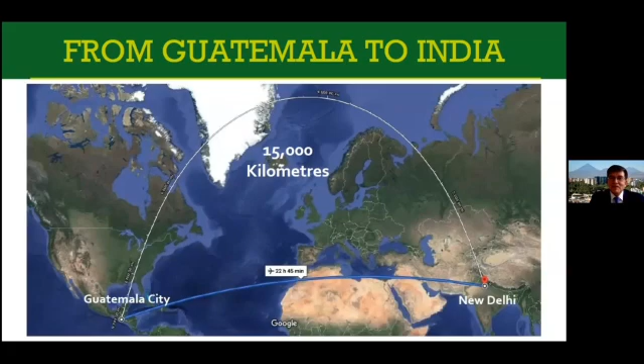And here's Guatemala, my country, so small compared to India - 17 million people and 108,000 square kilometers. That means we are 30 times smaller in size.

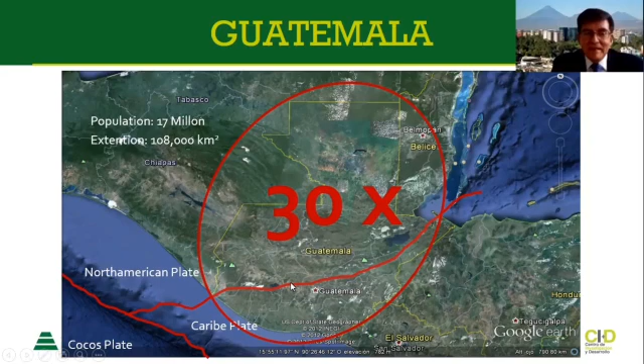But it's a very shaky place because we are among 3 geological plates - you could see here the North American plate, the Caribbean plate, the Cocos plate. That means lots of quakes and earthquakes, and lots of volcanoes - almost 40 volcanoes in that territory, at least 3 of them active.

So greetings to all from the beautiful Guatemala City, the capital of my country, Guatemala. Here we'll see a small introduction and background on the subject that we are talking about today.

In the year 2020, everything was okay, everything was going well. Everything in January, February of this year was good. But then, you know, disaster struck us everywhere.

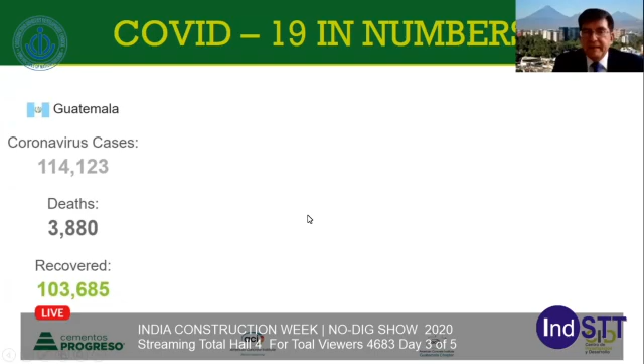And the ready-mix industry - what were the first reactions? It was a shock, what could we do? No more construction projects, everything stopped. What did we start to do as an industry? After the shock, we thought helping with cleaning the streets with lots of water and soap was the solution, and was a great idea maybe. We didn't know at the time if that could help with something. Maybe, I suppose, it was at least a psychological help, but unfortunately not more than that, and for sure nothing that would help our industry in the financial numbers. But at the time, we had the trucks, we had the people, so we tried to help.

From August up to date, everything seems rather normal, but the damage has been done already. We estimate we'll close around 85% of the original budget. Maybe not as bad as we estimated in April, when we thought getting to 50% was a good number, but we are getting around 85%, not as bad.

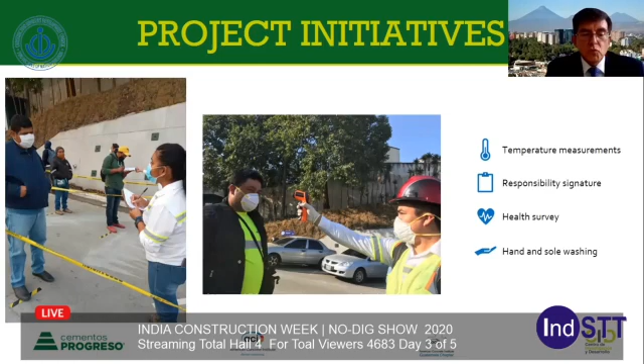But we have to take action. The projects opened again as early as May 2020, taking proper precautions: temperature measurements 3 or 4 times a day, a responsibility signature from every worker, daily health surveys, hand and shoe soles washing every hour or so. Even on the helmets you could find valuable information, using different colors, ID codes, week number, working area, working sub-area, type of activity, that kind of thing.

Our construction industry in Guatemala, including the ready-mix industry, is very conservative and rather slow, so to speak, where decisions on new methods and initiatives could take months, maybe years. So we had to find new ways to work, because we were trying to rescue the year 2020. And we did it, starting with the easy things to do: the cost reductions. We'll see some examples here.

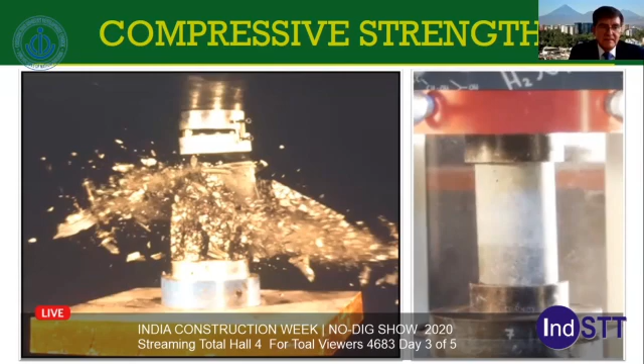But the problem is that we give in the range of what I call the gift zone. That's magnificent for the client, of course, but not much for us, unless in the present circumstances. So we review those gift zones for the different types of concretes and try to reduce them to where they should be, covering the required strengths, yes, but not much more.

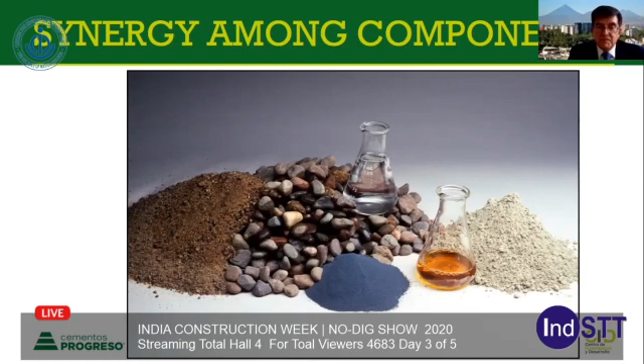And we save tons of cement, and tons of cement are tons of money. So the other important source of cost reduction focuses on achieving synergies between components of the mixes, for example the proper combination of different types of cement. We have several types of cement with different percentages of supplementary cementitious materials - in our case, natural pozzolan. Since we have lots of volcanic ash, that makes sense.

Usually the more SCMs the cement has, the cheaper it is. Interestingly, we found we can achieve significant cost savings when we use a combination of more than one type of cement in our mixes, combining performance with price. We have to make trials on this, but it pays off, as well as with other components such as the type of admixtures. The perfect combination could get you huge savings. At the end, these initiatives - monitoring required strengths, synergy between components like combining different types of cement or admixtures - could help you reduce costs. You have to invest in several trials, but they pay off, believe me.

Until now, we have not spoken of any technological advance or technical acceleration. But as I said before, our ready-mix industry in Guatemala is very conservative. We usually are not eager to try something new - and by new, I mean new in our market, because probably it's something old or state of the practice in other places, but not with us. They are not new for us.

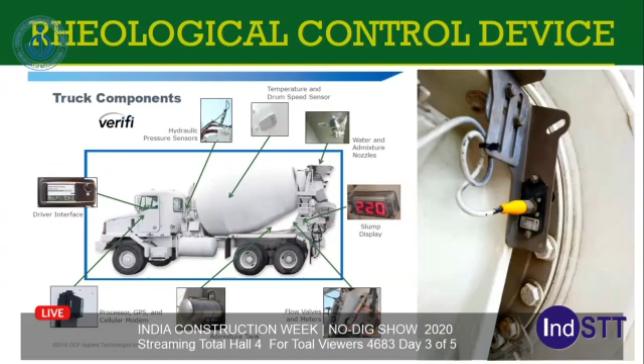For us, that was new. We knew about it, but we didn't care to implement it until now. All of these features have direct influence on acceptance requirements on the project, proper workability, maintaining water-cement ratio and strength, reducing the coefficient of variation. That was very important, because that permits reducing the amount of cement in the mix and making it more economical.

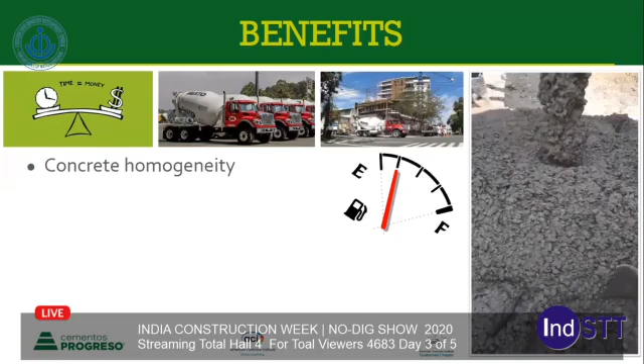And optimizing mix design. The direct benefits are that you have more homogeneous concrete with no rejections, which means zero disputes with clients on site, a task that consumes so much time and money. Also concrete stability and slump control. The mixing time is optimized also. The plant and in-project dead time per truck is greatly reduced, so you don't have the trucks waiting too much time or losing money.

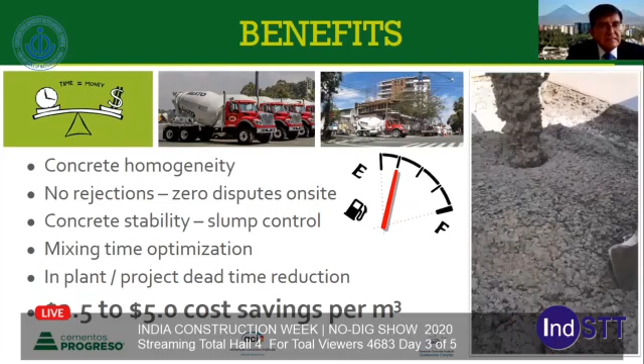All this means money, $2.5 to $5 per cubic meter in savings. That's what these devices could save for you. And that's a lot of money.

The other initiative is an example of what we are doing: estimating the strength of concrete by its maturity. In Guatemala, we measure strength by making specimens on site and then testing them in the lab. But as you see, making and handling specimens on site can influence directly poor strength results that are not in accordance with the placed concrete. By establishing a correlation between strength and temperature of the concrete, you can finally estimate, in real time, the strength of concrete in the element or structure.

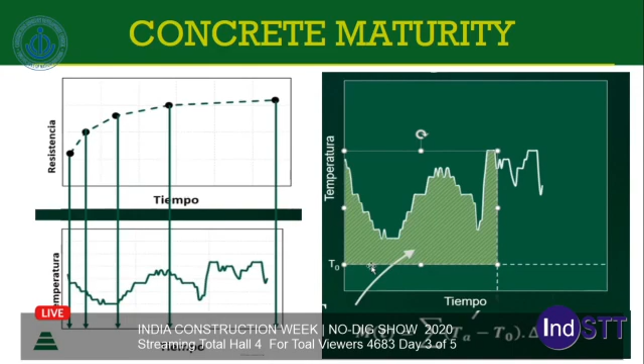Among the benefits we have: prediction of the actual in-place strength of concrete is important, and the phrase in-place is very important because you don't have that with specimens. Consistency on results. The results are collected in real time, another important phrase with this technology.

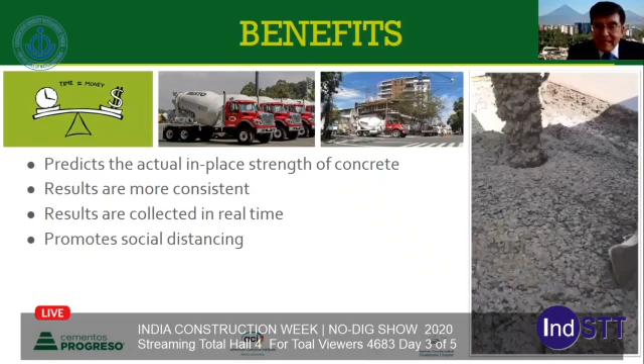And the promotion of social distancing - that is a direct consequence of the pandemic, because really, we didn't care about that before. Are you kidding? We love social gatherings. We love social events. We are Latin Americans. We love that, we love to be close to each other. But we understand now we have to take care of this.

And this methodology will help us maintain our distances. Also, we have direct cost savings compared with on-site quality and lab teams, instead of having people on the job site. Accurate job site planning, so knowing when to remove forms, for example, and financial savings as a whole for early completion of projects. So that means also a lot of money.

We are still determining the amount of savings we'll have with this initiative. We are working on it.

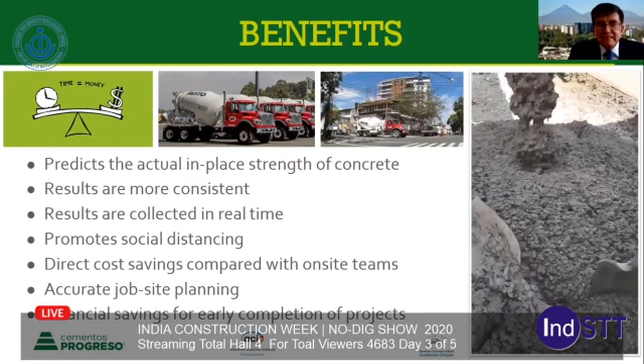And finally, as conclusions of this presentation, we know COVID-19 caused very negative impacts on the construction industry and the ready-mix industry, that's for sure. But with proper actions, we were able to come back. Probably not to 100%, but we are doing better than we expected in April of this year. And also, COVID-19 was an accelerator. It seems contradictory, but something bad accelerated our adoption of new ways of doing things that maybe before we were afraid to use, but now we use thanks to COVID-19.

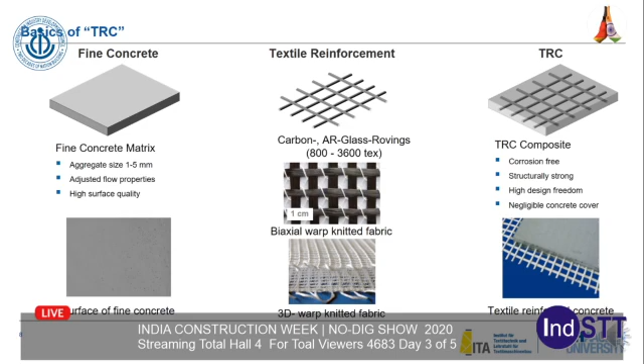TRC composites are corrosion free since the reinforcement does not corrode, dissimilar to traditional steel reinforcement. In addition, TRC composites are structurally strong because especially carbon fibers offer very high strength. They offer a high design freedom and a negligible concrete cover. So textile reinforced concrete offers many advantages over traditional steel reinforced concrete.

The reinforcing materials are usually carbon and alkali-resistant glass, but in addition basalt fibers and polymer fibers, for example aramid, PVA or PP fibers, can be used. Here, the reinforcing materials can be tailored to each application. For example, if very high strength is needed, carbon is the material of choice, but carbon fibers are quite expensive, so if less strength is suitable, it's better to use alkali-resistant glass or basalt fibers.

Why should you use textile reinforced concrete? In steel reinforced concrete, the concrete bears compressive forces and the steel bears tensile forces. This combination of material properties has led to the high success of steel reinforced concrete, making it the most important building material globally. However, the reinforcement is corrosion prone and requires a thick concrete cover, leading to high weight of the materials.

Steel reinforced concrete also offers a wealth of experience with more than 100 years of the material being in use and many general building approvals being available. However, the transition to textile reinforced concretes offers resource savings of up to 80%, leading to reduced CO2 emissions of up to 80%. Thicknesses can be reduced, depending on loads, by up to 70%, and the weight of building materials or precast elements can be reduced by up to 50%.

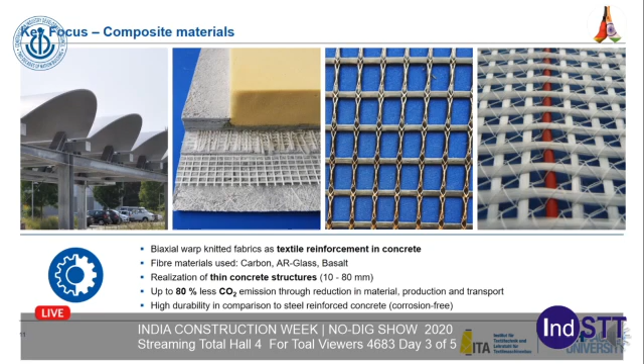In addition, we focus on intelligent textiles and product by functional integration, by means of using technical textiles. These technical textiles can offer a wealth of additional functions, for example surface heating, sun protection, heat protection, etc. We also study 4D textiles, which are facade textiles that can adapt to environmental influences over time by textile integrated mechanisms, for example closing a sunshade if the sun is high in the sky. In addition, we've researched shaped fibers for acoustic insulation, for example used in office spaces or in event locations.

Another focus of our institute is sustainability. Here we develop new sustainable resource-efficient materials, such as TRC. One very important topic for TRC is the design for recycling of textile reinforced concrete, where we already plan now for reuse of buildings built with TRC after their lifespan of up to 80 years is exceeded.

In addition, we research the application of recycled short carbon fibers in concrete and mortars, and we do efficiency analysis of composite production processes to decrease material and cut-off waste.

Another area of research is in geotextiles, where we do machinery development for production of leno-woven fabrics with high grid sizes as suited for geotextile applications, and we work on integration of warning systems in buildings and dikes to prevent natural disasters by using smart textiles and integration of sensors.

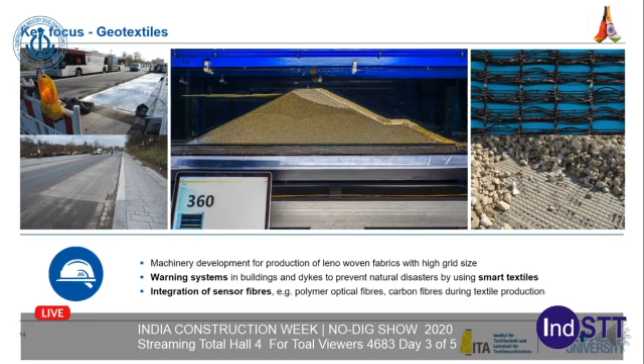All these developments we do at our institutes are not only theoretical in nature, but we have also produced a lot of demonstrators over the years.

For example, in 2009, while just building our new machinery hall, we built walls with the first TRC sandwich facade worldwide, and the facade still looks as good today as it looked the day it was built.

In addition, we developed light-transmitting concrete facades in cooperation with industry, functionally integrated TRC roofs which integrate either photovoltaics or thermics into the roof elements, and we developed curved concrete elements, as showcased in the pictures, which show that textile reinforced concrete offers highly adaptable thin structures with thin-walled elements for architectural purposes and to reduce weight and improve resource efficiency.

We offer here at ITA a cooperation along the entire value chain, starting with textile development and with 2D and 3D warp knitted reinforcement textiles, as well as leno-weaved textiles.

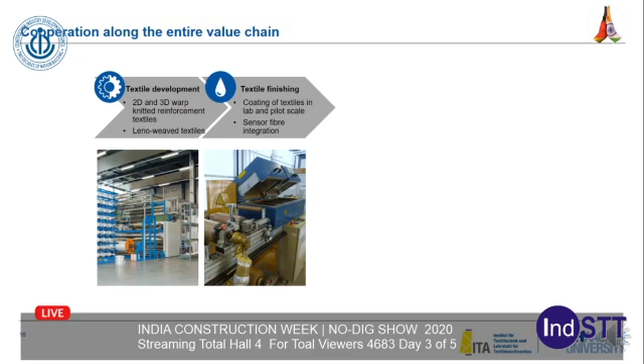Continuing with textile finishing, where we do coating of textiles on lab and pilot scale, and sensor fiber integration if necessary. We also allow for prototyping in our concrete lab, where we manufacture prototypes as well as standard testing specimens, and we also have polymer infusion labs analyzing polymer coating materials.

And we have acclimatized testing facilities where we can do fiber, textile, and composite testing, as well as optical and electron microscope tests, as well as an X-ray CT.

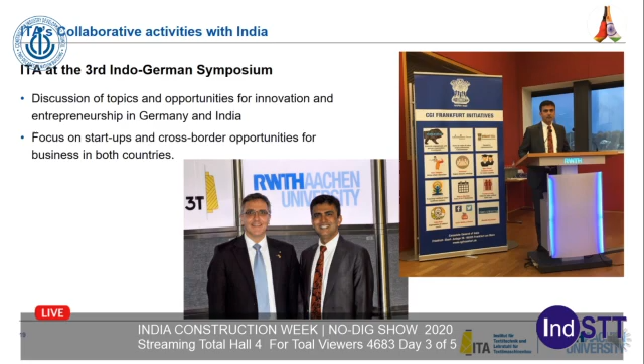Moving ahead, at the 3rd Indo-German Symposium, topics and opportunities for innovation and entrepreneurship in Germany and India were discussed. The focus was on startups and cross-border opportunities to channelize the developments made in the textile field at ITA into the Indian market through campaigns like Make in India and other government initiatives.

Now I would like to throw some light on one of the 2 projects which were initiated at the IGSTC board meeting, which I have mentioned before. The project name is Clean Water, and the goal is development of modular lightweight wastewater treatment units made with TRC for rural and peri-urban dwellings.

The project was initiated to tackle problems of untreated wastewater which is being discharged into the environment. Many regions have no access to wastewater treatment plants, and also face the high energy and space requirements which the current systems need.

Hence, the aim was to develop, manufacture, and implement a modular, low maintenance, energy saving, textile reinforced concrete wastewater treatment plant. Using textile reinforced concrete, the sewage plants can be made modular and of low maintenance.

The approach adopted for this project was first of all to develop a design for a TRC wastewater treatment plant. Secondly, to verify the load bearing capacity and suitability for use of the sewage plant at the respective site. And at last, to develop a transport system so that this wastewater treatment plant could be set up even in the most secluded villages in India.

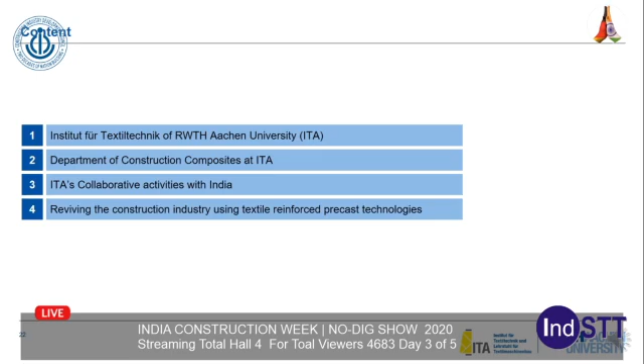Now I would like to put forward two research topics which we think will be beneficial for the revival of the construction industry. Firstly, textile reinforced 3D concrete printing. 3D printing has already found its way into the construction industry. There are already houses being 3D printed, but the deficit at the moment is that the 3D printed concrete doesn't have any reinforcement, and hence the absorption of the tensile forces is only possible via the matrix, which in most cases is not strong enough to sustain the forces which act upon the building.

And thus, the aim is the realization of an endless fiber reinforced 3D concrete printing process. The approach which can be adapted for 3D printing of endless fiber concrete is with the help of robots and textiles, and hence we aim at development of a process for the production of 3D textile reinforced structures.

Another way in which we can revive the construction industry is by using adaptive molding technology for the manufacturing of doubly curved textile reinforced facade elements.

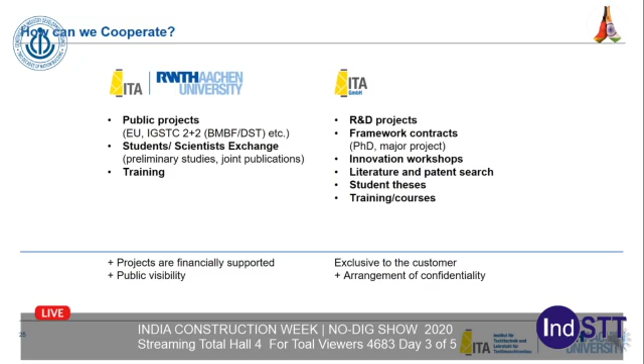Now I would like to summarize today's presentation in a nutshell. ITA is a leading textile research institute in Europe with more than 20 years of experience in textile reinforced concrete. The first tests on textile reinforced concrete were done at our institute back in 1998.

TRC offers multiple advantages over steel reinforced concrete, like higher strength, less weight, eco-friendliness, and resource efficiency, which makes TRC suitable for precast elements. And thus TRC enables a sustainable revitalization of the construction industry, as due to the lightweight, transport costs are being saved. Due to material efficiency, less cement is being used.

We are constantly looking for research partners with whom we can collaborate and further develop the textile reinforced concrete technology.

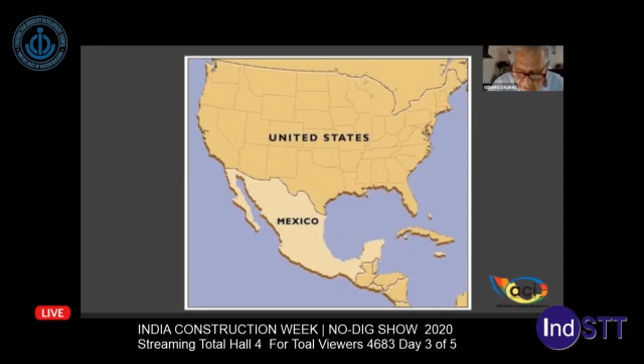Between these two countries, we have a border area that is growing because of the commercial treaties between them. You will find on this location cities that share friends, family, and partners.

Over the last 50 years, trade between these two countries has been increasing, and there is a lot of work on light industry. It started in Chihuahua State with the main city on the north, Ciudad Juarez, with about 1.25 million people, and some more important cities in Chihuahua State.

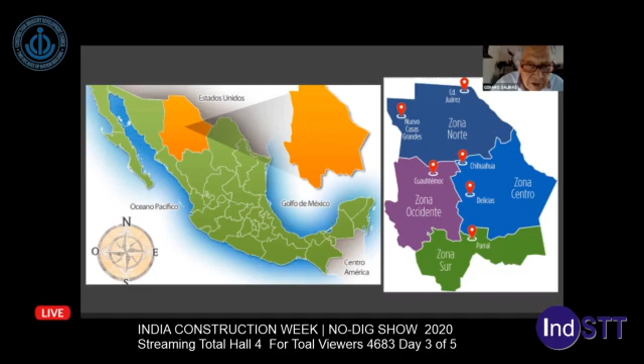And we have, over this period of time, changed some of the things in these buildings, like the roof, which moved from laminated asbestos to standing seam steel. The walls changed from masonry concrete units to tilt-up concrete panels.

The volume of these buildings increases, with the distance between floor and ceiling growing from 6 to 12 meters. And the industrial floor slabs, we have changed from a strength of 20 to 35 megapascals, and the distance in joints from 4 to 30 meters.

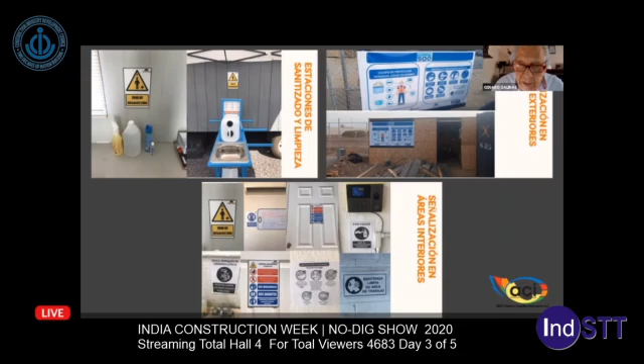At this time, because of the pandemic we are having right now, this is the way we are doing signage on the outside. Right here on the top right, all the signals that we have inside and outside of the building. On your upper left, you will find some sanitation areas where you can clean yourself and be protected. And inside, you have different types of signs talking about the equipment needed in different areas.

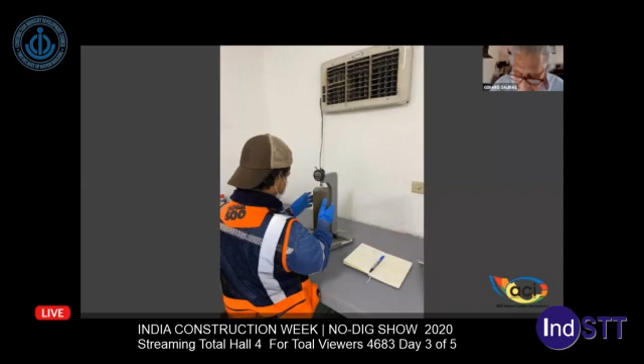Since the beginning of concrete production, everybody keeps a safe distance and wears all protective gear, even in the lab and on the construction site, like on these big floors that range from 1,000 to 2,000 square meters daily.

Even at different hours of the day, the inspection team always keeps their safety gear. And during all operations of construction, everybody has to wear the safe equipment to the end.

Because of this big boom in this industry, a lot of people came from other parts of the country, and we have an unemployment rate of zero. So we need to have housing for this population.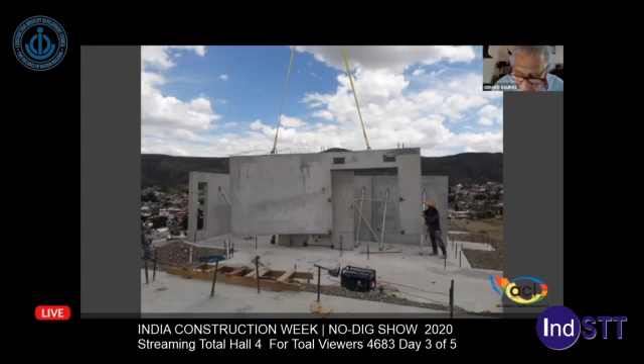And right now we're working on this housing in a precast mode, like right here. Before that, it used to be done this way, with handmade clay brick, post and beam construction.

This type of construction that we're using right now, precast, is what we use right here. This IMSS stands for the government department that deals with social security services and health services.

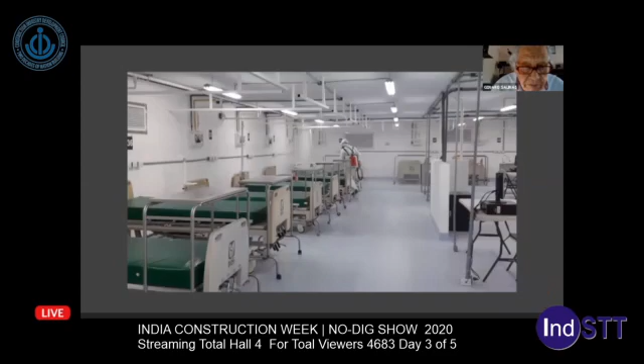And this is a hospital, a 60-bed hospital that we built in 15 days using the same precast mode, with all the equipment set and ready for any emergency during the pandemic.

This is the team that designed and inspected the construction of this hospital. And here are all the people that did the work in a safe mode, as I'm talking to you.

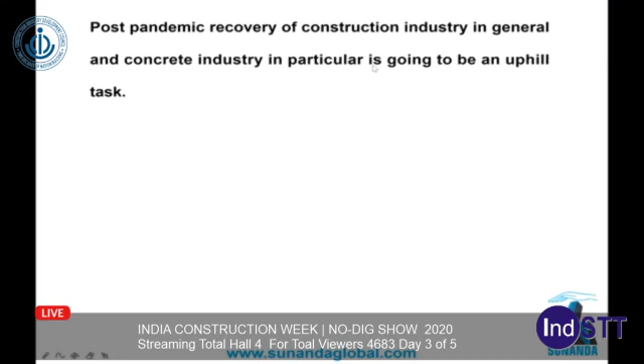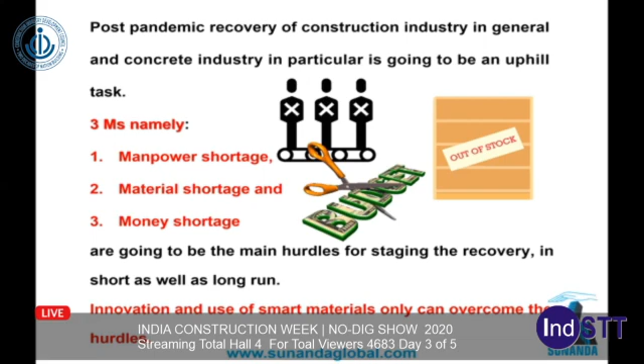As all of you know, post-pandemic recovery of the construction industry in general and concrete industry in particular is going to be an uphill task. We have been experiencing it for almost 10 months. Three Ms, I call them: manpower shortage, material shortage, and money shortage, are going to be the main hurdles in staging the recovery in the short run as well as long run. That's why innovation and incorporation of smart materials can overcome these hurdles. It can happen for greenfield projects as well as brownfield projects, because both require these 3 M's.

What do we have to look at? We have to look at reducing person-to-person interface in time to come - that is social distancing, respecting social distancing. This means despite low availability of manpower, we still have to enhance the output, the production. So this is about manpower and social distancing.

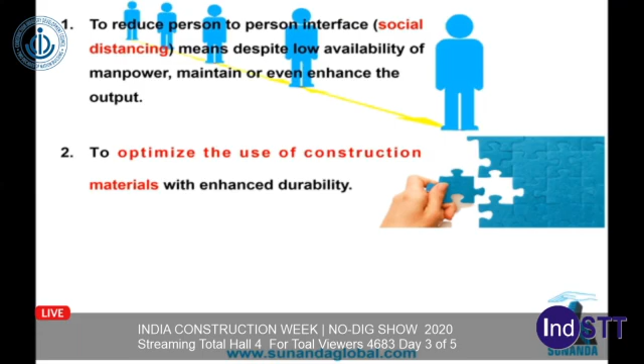Then we have to optimize the use of construction materials. We have shortage of materials, so we have to optimize that. At the same time, we have to make sure that the durability of the structure is also enhanced. And this together will in turn give rise to lower carbon footprint and reduced expenditure, at the same time leading to sustainability.

This smart concrete concept has been there for the last few decades, 2 decades, but it has not become popular yet. Why? Because probably the need was not felt, which is so much now today. So in smart concretes, self-cleansing, self-sensing, self-adjusting, and self-healing types are prominent, and they are useful in greenfield as well as brownfield constructions.

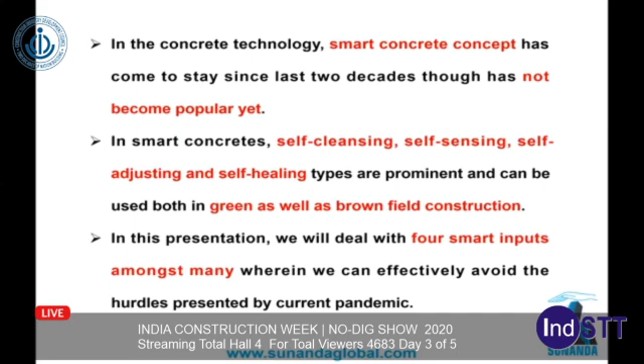Today's presentation, of all these smart inputs, we will deal with 4 smart items amongst many. First will be self-healing concrete, which will avoid cracks in concrete and enhance the structural stability and durability. Then we will talk about gaining the strength of concrete without external curing, which involves lots of manpower and possibilities of human error. Third point will be enhancement of service life.

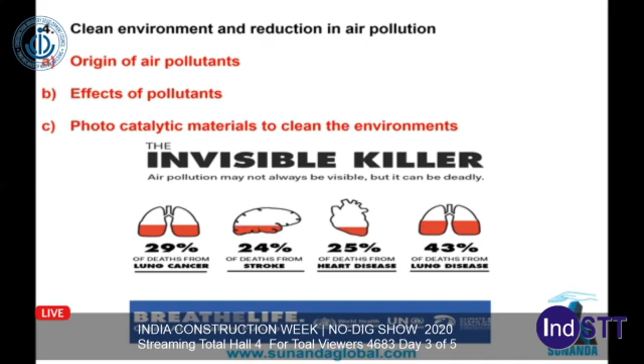Due to corrosion, lots of damages are happening, and we will try to mitigate this corrosion with smart materials and enhance the service life. The fourth point is very important in the post-pandemic era, that we have to maintain a clean environment. We have to reduce air pollution by reducing the pollution effects on structures. For that, we need to identify the origin of air pollutants, identify their effects, and then ultimately use photocatalytic materials to clean the environment and make it cleaner for us to inhale or exhale.

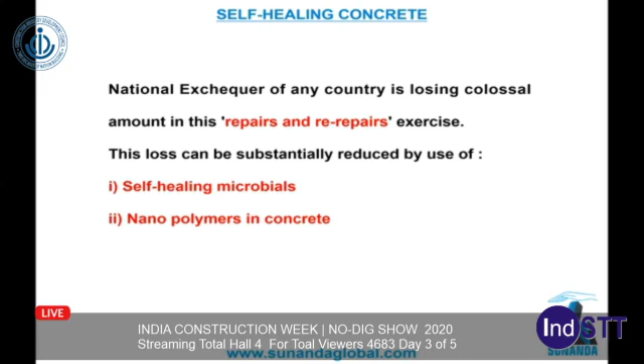We always see that most structures do not even give effective service for 25% of their service life, and that is mainly because of cracks. When cracks appear, corrosion takes place, and when corrosion takes place, repairs and re-repairs exercise begins. That is where we can use two smart technologies: one is self-healing microbials, and another is dispersion of nanopolymers in fresh concrete.

And this will not require any labor, this will not require new money, or any material, because all these three M's have been utilized right in the beginning of concreting.

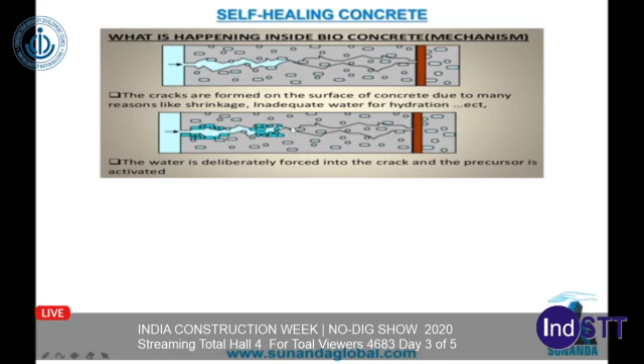This is the pathology of self-healing concrete cracks. In the first top diagram, you can see the crack developed. In the second diagram, you can see these microbials and calcium lactate coming in contact with each other to form calcium carbonate. This yellow material you see is calcium carbonate, formed in situ, and the crack has been filled, thus allaying the fear of danger or corrosion to the concrete structure.

I talked about the second option, nanopolymers. Nanopolymers are nanoparticles of liquid monomer, and that liquid monomer is easily dispersed throughout the concrete. Being nano in size, though used in very small quantities, it is present everywhere throughout the concrete.

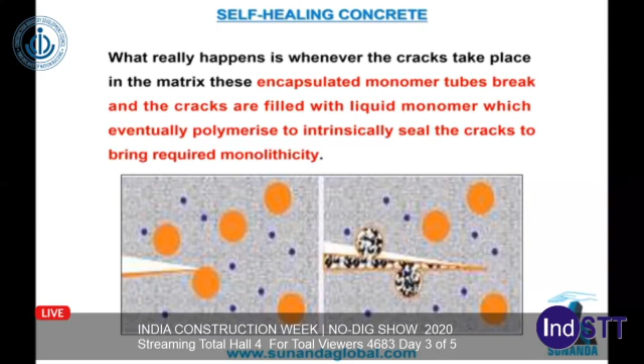Whenever a crack develops, like in the first picture the crack has started to develop, and in the second picture the crack has developed more, the nano tubes or nano-encapsulated monomer tubes will get accumulated in this crack. The encapsulation will break, and then that monomer will convert into polymer, filling the entire empty space, resulting in no loss of structural strength or concrete strength, and no ingress of moisture or chlorides from outside.

The second point we want to talk about is curing. Curing is an unavoidable operation. Unless curing is done very diligently and for a given number of days, the concrete structure suffers in its service life, suffers in its strength, suffers in the cracking pattern.

So gaining the strength without involvement of a human being, without involving any external operations, would be a smart thing, and we are going to talk about the same.

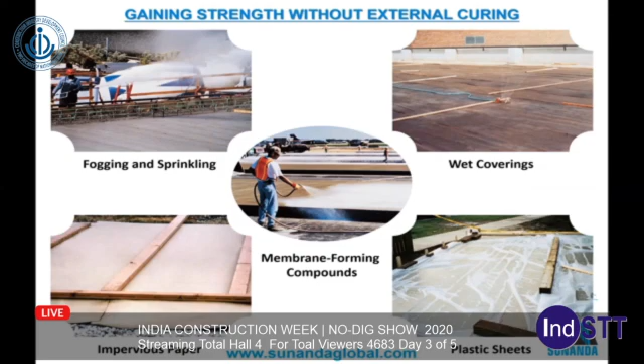These are the classical methods, good methods, classical methods of curing. There is fogging, wet covering, membrane forming compounds, then impervious paper and plastic sheet. All these are good, but they are man dependent, human error dependent, and time dependent. If there is any mistake in any of these, then the curing suffers, and in turn the structure suffers.

Now in post-pandemic times, all these mistakes are unaffordable because we have shortage of manpower while doing the structure itself, shortage of funding, shortage of resources, and shortage of materials. So for large structures or small structures, curing has to take place continuously, and that can happen only in a smart way.

What you see in the first two slides is concrete external curing. What happens is water penetrates inside and keeps the hydrated concrete in the hydrated form, reducing the escape of hydration water from the concrete to outside. But again, it is subject to the errors that I mentioned earlier.

Then we can see that whenever we are using an internal concrete admixture, underneath this classical curing, what will happen in post-pandemic conditions? If you try to do classical curing like water curing, then because of shortage of manpower and other things, the curing will not happen properly, and the depth of concrete curing will be much less, as you can see here.

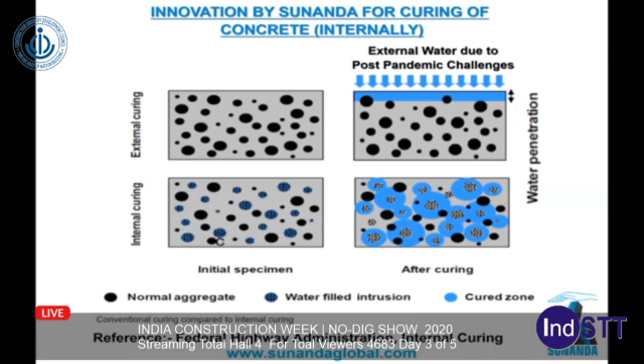However, post-pandemic, this should become a habit of the construction industry.

We are going to talk now about corrosion mitigation. Corrosion mitigation can be done by giving coatings to the steel or to the concrete, but there are always chances of errors, and because of that, the performance of corrosion prevention suffers. Corrosion, as you know, is a continuous process; it never sleeps.

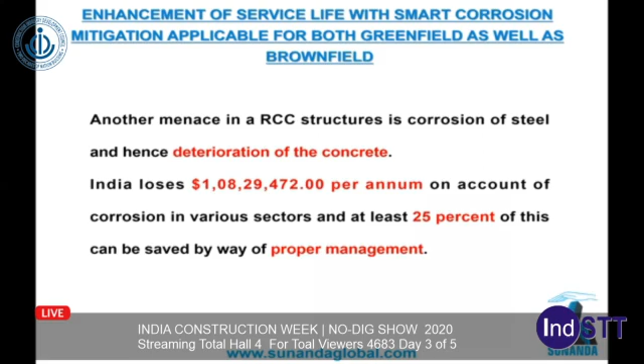There is a small entry point for these enemies of steel, that is moisture, chloride, or SOx and NOx, and in that case corrosion will start. So what we need to address is that corrosion losses are huge, as you can see here. Corrosion losses in India itself are to the tune of an astronomical figure per annum. You can imagine what the cumulative losses must be in a large country like India, and extrapolate how much the losses must be anywhere else in the world.

So in the post-pandemic era, if we look at this cycle of repairs ultimately approaching the end of serviceability, we are talking about additional cost of manpower, material, and money. These three are the unaffordable 3 M's, and that's why it's very important to avoid corrosion at all costs, if possible, smartly.

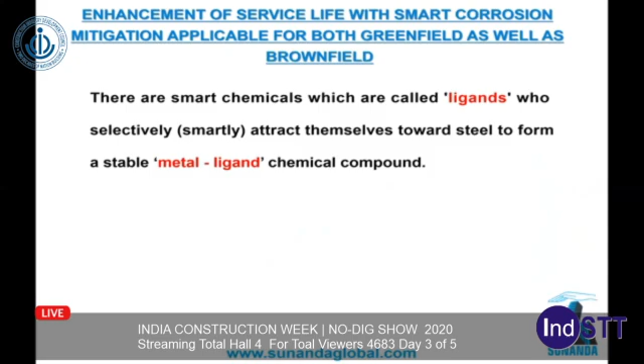We are using in green concrete chemical materials called ligands, and these ligands form a stable compound through interaction with metal. In this case the metal is steel, and they form around the steel a monomolecular layer without any blemishes or flaws, protecting the steel for many years in the service life of a structure.

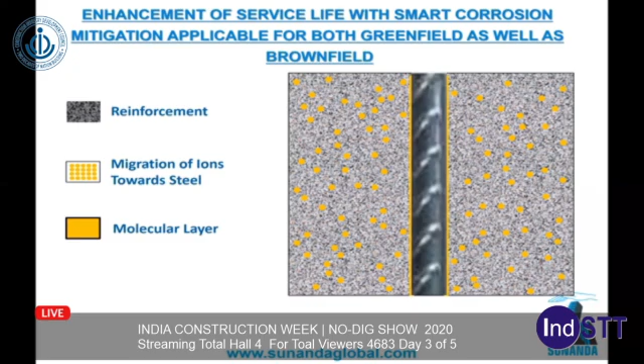The mechanism is something like this: these molecules are spread all over the concrete, and they will be attracted towards the steel, forming a coating around the steel without any pinholes or defects, which will not allow the steel to corrode anymore.

Obviously, these are useful for structures either in the greenfield zone or brownfield zone, all throughout the remaining service life.

Now we talked about clean environments and reduction in air pollution. As we see many structures, unless repeatedly painted, they turn blotchy, develop spots, or show big clouds of algae formation.

So we need to identify the origin of air pollutants, their effects, and then the remedy: photocatalytic material. Photocatalytic materials mean catalytic degradation of impurities happens with photoenergy, and that photoenergy comes from nowhere else but solar light.

These are pictures of pollution in various metros of India. The case is the same everywhere, mainly because of the growth of motor vehicles. We have about 30 million motor vehicles in the country, and they are growing every year by a large number.

These vehicles emit carbon monoxide, NOx (nitrogen oxides), and volatile organic compounds, which pose great danger to the human respiratory system as well as the environment. Other effects of this pollution include acid rain, algae growth, and ozone layer impacts.

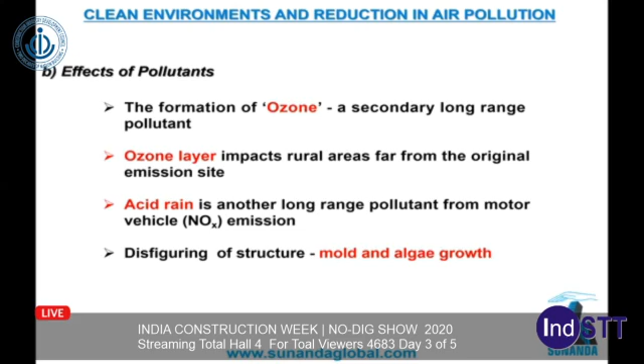By reducing the number of vehicles? No. By converting all those 25 million plus motor vehicles in India alone to compressed natural gas, CNG? I don't think it is possible. Then are we in a hopeless situation? Because of smart materials, we are not.

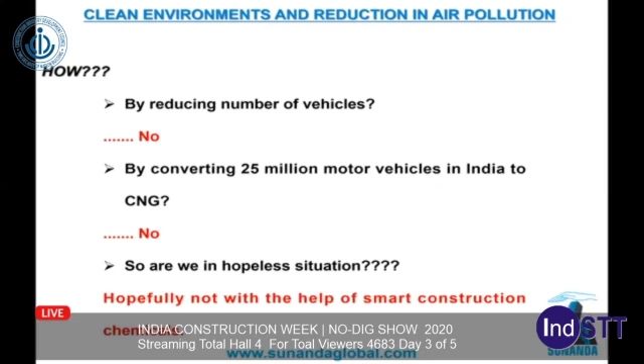These smart materials, photocatalytic materials, used in the concrete itself, will protect cities and rural areas on a day-to-day basis throughout the lifespan of the structure, and this will happen whenever the sun is shining - that is almost every day, barring a few days in the rainy season - and that is smart.

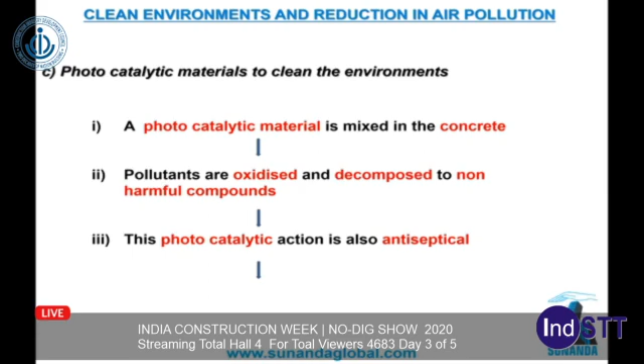Photocatalytic material, as I mentioned, is mixed into the concrete, and when mixed in, pollutants are oxidized and decomposed in the presence of photons or photo light. The action is also antiseptic because it destroys algae, and it self-cleans, keeping the surface clean. These are replenishable materials, and that is why this becomes a very smart case.

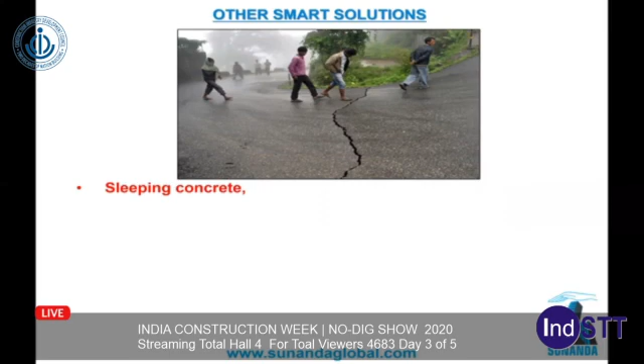After this, we have to look at other options also. Other smart solutions could include sleeping concrete, zero energy concrete, progressive time-based soil stabilization, bendable concrete, and conducting concrete, which is very important for new smart cities and monitoring vehicular traffic. These are some possibilities of smart construction materials, but let's begin with the basic four so we can save on our 3 M's - manpower, material, and money - in the post-pandemic era.

So in conclusion, self-healing concrete, internal curing, smart corrosion mitigation, and photocatalytic chemical cleaning of the environment can be smart solutions to overcome the 3 M's: manpower, material shortage, and money shortage. Thank you for your attention.

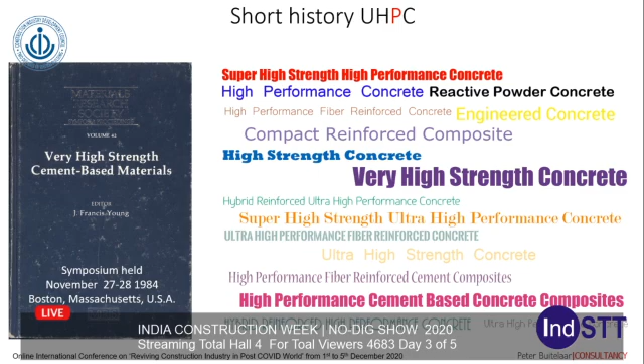Since 1978, the UHPC developed by Bache has been tested, investigated and described in publications and proceedings. Often it was classified as ultra-high strength concrete. Shortly after, many names, mostly related to the compressive strength and not to the performance, were used to differentiate UHPC materials from traditional concrete. In 1983, Aalborg Portland founded Densit AS.

Densit AS created four separate divisions to develop and market the UHPC in different business areas. Security industry: UHPC is used as a barrier material in vaults, strong rooms, ATMs and protective structures against explosives and other threats. Wear protection: UHPC is used as wear lining in systems with abrasive wear, like in cement factories, coal-fired power plants, steel factories, etc.

Very hard, wear-resistant aggregates like silicon carbide, corundum and calcined bauxite are used, while the material can be applied by casting, spraying, hand trowelling and prefab made elements. The UHPC can replace many other materials and is used, for example, to replace the cast iron scoop feeder in cement factories, resulting in a much longer service life.

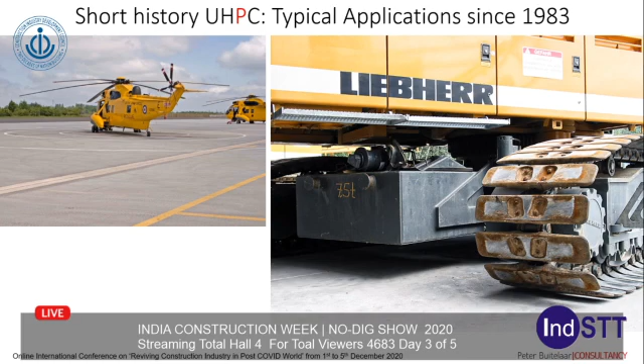Civil engineering: UHPC is used as shotcrete applied in very thin layers, as abrasion and erosion resistant overlays and toppings in sluices and dams, and as semi-flexible pavements, toppings and overlays on industrial floors, pavements and bridges. UHPC is also used as a repair material for corroded piles, and later as a structural grout for strengthening offshore platforms and offshore wind farm foundations.

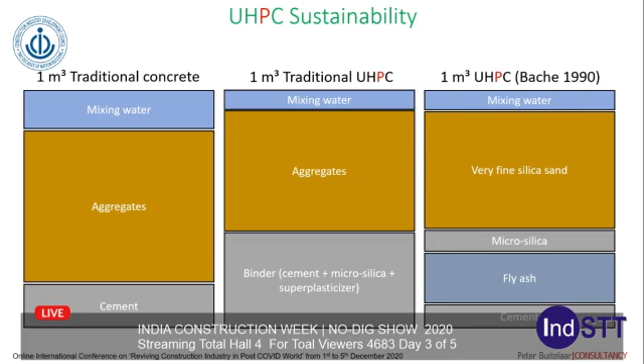Compared to traditional concrete, traditional UHPC contains 50 to 100% more cement, and we know that the cement industry is one of the main producers of carbon dioxide, a potent greenhouse gas. By using supplementary cementitious materials as a replacement of cement, a more sustainable UHPC can be produced. An example of this approach is the extreme UHPC materials developed in 1990.

The Cement and Concrete Laboratory of Aalborg Portland in Denmark is again taking a leading role in new developments. White cement is combined with white metakaolin, limestone and additives, resulting in a very white UHPC with very low autogenous shrinkage.

More and more, produced UHPCs are using a design philosophy based on sustainable construction, taking the possible and potential impact on our environment into account. This is complex, since all parameters should be taken into account to get a reliable output and comparison with other construction materials. A UHPC technology design philosophy combines limit state design and durability design, taking sustainable construction into account for an optimum balance between total service life and UHPC performance.

This consists of the performance needed for a UHPC. By using environmental-based optimization, correct choices can be made for sustainable construction through material optimization, in which the selection of materials, the possible use of recycled materials, and the use of supplementary cementitious materials are priorities for the production of UHPC. By optimizing the shape, the structural design, and the service life of elements and whole structures, formwork, storage, handling, and transport on site can minimize waste of materials and reduce the impact on our environment.

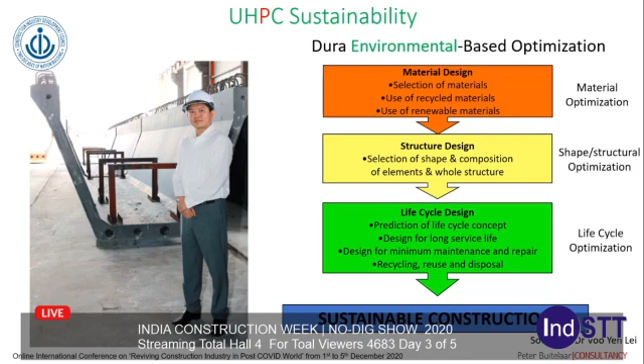Since 1978, Dr Voo Yen Lei made different designs to optimize the use of UHPC in structures like bridges, resulting in slender structures and large spans. Today, many engineers are trying to put this into practice, calculating and designing bridges with very large spans, up to even 1,000 meters.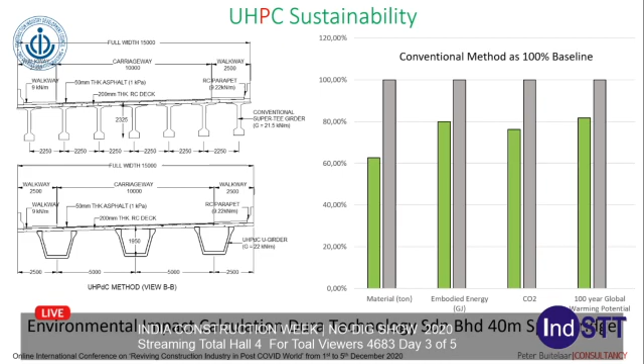Dura Technology in Malaysia is taking a leading role here, with several hundred slender bridges, often with large spans, built using UHPC. Despite the large amount of cement used per cubic meter, UHPC is an interesting alternative to traditional concrete and steel, and when environmental-based optimization is used, it has a lower impact. Standardization of elements and structures will result in an even lower impact.

Heicon AS in Denmark is the first company to obtain an environmental product declaration for a type of precast balcony. A very detailed investigation was made to take all data into account. The product declaration is based on a life cycle assessment in compliance with European standards. Compared to traditional concrete balconies, UHPC balconies have less impact on the environment, with 25% less carbon emissions. Fine-tuning of the UHPC can result in even larger differences.

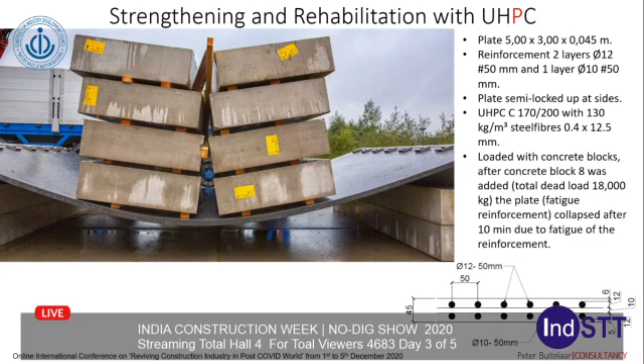After loading the test plate with up to 18 tons of concrete blocks, the panel finally collapsed due to fatigue of the reinforcement. Using stronger reinforcement, like high-strength steel tendons or Kevlar, will result in much higher flexural strength and fatigue resistance. Very slender hybrid reinforced UHPC panels are used to replace deteriorated existing reinforced concrete decks on steel bridges, reducing the dead weight of the deck and thus the total structure, resulting in a durable deck and an extension of total service life.

After placing the slabs on the new girders, the connection between the UHPC prefab panels and the new girders with studs is grouted with UHPC to create a durable connection.

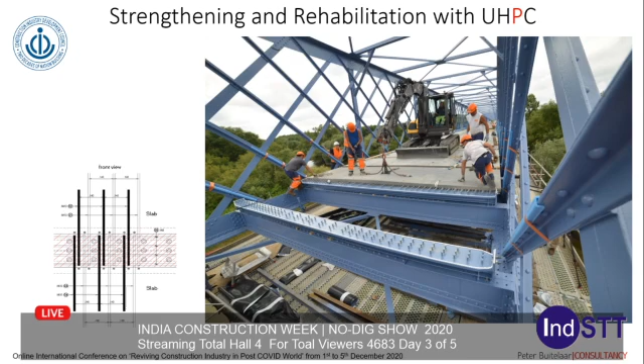Originally developed as a CRC JointCast in Denmark by Aalborg Portland in 1994, to join prefab concrete slabs in the middle of a span and over the columns for two new buildings at Aalborg University, it was used to provide a solution that is better, faster, or cheaper, and when possible, all of those.

Examples could be where traditional joints are much too complicated or too expensive, or where the possibility of having a full-strength joint in 3 days can be used in the building process. This was investigated in 1998 in a project with Swedish Strängbetong to replace traditionally used joints in precast bridge slabs.

Contractor Shimizu from Japan has carried out several tests on CRC JointCast in 1997. The first of these tests concerned a joint between two beam parts.

CRC JointCast has been investigated in 2001 in a large research project carried out by the Building Research Establishment in the UK.

Accelerated bridge construction consists of innovative bridge construction methods used in a safe and cost-effective manner to minimize inconvenience to the traveling public while delivering a superior finished product. This technology has become common over the last two decades in the United States, and many states are considering ABC on more typical projects. The use of prefabricated bridge elements facilitates ABC.

These elements are typically produced in a controlled environment that facilitates high production quality. The most critical field construction process for prefabricated elements are the connections between the elements. In general, connections must be robust, durable and efficient.

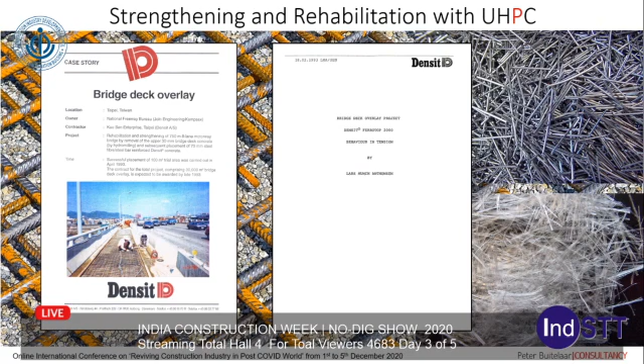Also in the Netherlands, many bridges, especially when built in the 1960s until 1980s, are underdimensioned and often deteriorated due to chlorides. In a small country with many rivers, bridges are essential, and long shutdown periods for repairs and replacing are unacceptable.

The hybrid reinforced UHPC is an ideal solution to strengthen and replace deteriorated concrete decks and to extend the total service life of the structure.

In 1999, I designed a solution using a hybrid reinforced UHPC overlay to strengthen concrete bridges and viaducts, to be able to use the complete width of the viaduct and to allow heavy trucks to use the emergency lane at the shoulder of the viaduct.

Often the bonding is not sufficient due to the properties and deterioration of the existing concrete deck. I use the good, the bad and the ugly method to differentiate the quality of the existing concrete deck in the design.

In most cases, I believe that shear anchors are necessary, and I suggested a combined system of a stud with an adjustable plate as a leveling of reinforcement and shear anchor.

Application of the UHPC with a slip form paver is not only very practical, but is also technologically the best option. Fast placing, extreme compaction, low shrinkage, very high compressive strength and extreme durability are the result.

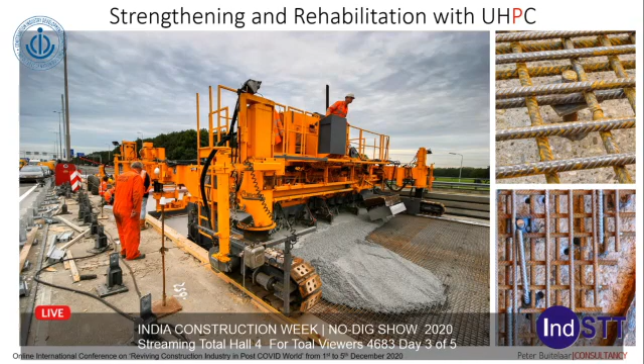In Switzerland, many deteriorated bridges have been strengthened and rehabilitated during the last decades. UHPC is also replacing the very expensive waterproofing used before to avoid chloride penetration in the concrete structure.

Approximately 25% of the 600,000 bridges in the US require rehabilitation, repair or total replacement. However, the work from on-site construction activities can have significant social impacts to mobility and safety. In many cases, the direct and indirect cost of traffic detours that result from the loss of a bridge during construction can exceed the actual cost of the structure itself.

For example, full lane closures in large urban centers or on highways with heavy traffic volumes can have a significant economic impact on commercial and industrial activities in the region. Partial lane closure and other bridge activities that occur alongside traffic can also lead to safety issues. Because of the potential economic and safety impacts, minimizing traffic disruptions is a goal that should be elevated to a higher priority when planning bridge-related construction projects.

Royal Flora Holland is the world's largest flower auction and the world's 5th largest building. A cold store for flowers, a former indoor parking deck, thus designed for relatively light dynamic and static loads, was created by using foam glass insulation panels with a hydraulic bound bitumen emulsion as topping.

Relatively fast damage occurred due to the high dynamic loads and static loads of the transport vehicles and flower carts with small hard wheels. The consultant tried a lot of potential solutions, but nothing worked.

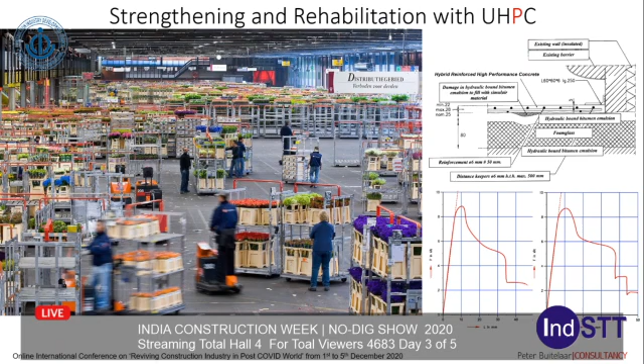The client is very pleased because the floor is still working after 25 years in use.

In 1999, I was invited to write an article about the unique project in the Dutch professional journal Cement. After publication of my article, the Dutch Ministry of Infrastructure and Water Management contacted me to develop a UHPC overlay to solve the very serious fatigue problems of the large orthotropic steel bridge decks.

Due to the increase of both the traffic intensity and the axle loads, which was not foreseen in the original design, premature fatigue cracks occurred.

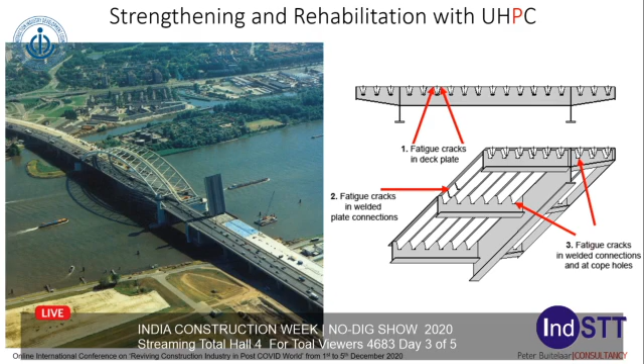These cracks are initiated in the welds and the steel plates and resulted in decreased safety for the users. The problem was before solved by frequent inspection, local repair of cracks and resurfacing the deck plate with a new asphalt wearing course. Fatigue of orthotropic steel decks is a well-known problem worldwide and mainly related to the thickness of the deck plate.

On the Moerdijk Bridge, the guss asphalt wearing course had to be replaced every 5 years, and several kilometers of short cracks needed to be welded together again. This is not only very expensive, but also has impact on environment, transportation and mobility.

Cracks occur on the underside of the deck plate, and if the crack becomes visible on the top side of the deck plate, then the crack is approximately 60 centimeters long. When there are several cracks in the deck plate in an area, the whole part of the deck plate needs to be replaced, and in that case a supporting structure needs to be welded on the deck plate first to avoid deformations of the structure.

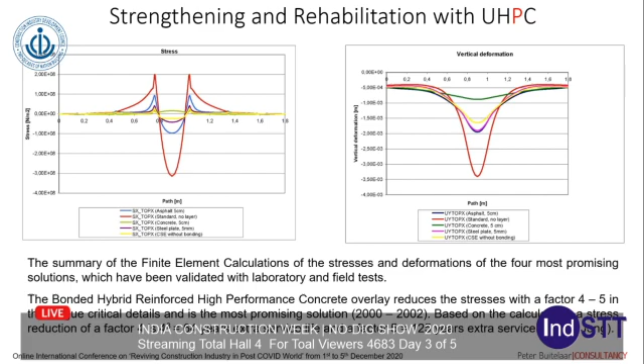After my proposal, including all the important details, the suggested bonded hybrid reinforced UHPC overlay has been tested during 4 years before a pilot project was executed in 2003. All tests and comparisons with other alternative strengthening methods showed very promising results, with the reduction of the stresses in fatigue critical details by a factor of 4 to 5, and a potential extra service life of up to 50 or even 100 years.

To replace the existing wearing course with the hybrid reinforced UHPC overlay, the bond between the steel deck plate and the overlay is of crucial importance to secure total deck stiffness and a uniform monolithic behavior under all circumstances. For that reason, the first investigations were focused on creating a bonding zone that met all requirements.

A bonding zone can easily be created by connecting the mesh reinforcement and the steel deck plate by welded studs, but this might result in local peak stresses and potentially new cracks.

This method turned out to be the use of a two-component epoxy-based adhesive with sprinkled-in bauxite aggregates. This resulted in a very good durable bonding strength of 4.8 megapascal, and even 12.5 megapascal bonding strength in shear.

Before applying the bonding zone, edge details were glued on the steel deck plate. After applying the bonding zone, the reinforcement is placed on rebars as spacers. The present reinforcement configuration is around 12 mm with a mesh of 75.

Placing of the UHPC on the first orthotropic steel bridge decks in 2005-2008 was done with the traditional double vibration screed. This is a complex method and requires many workers and supervisors on site.

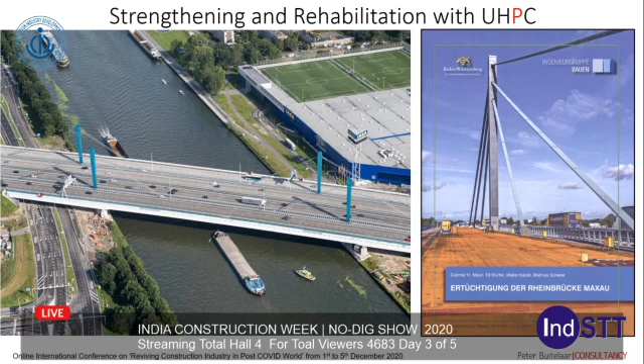During the period 2005-2016, 9 large orthotropic steel bridge decks were strengthened with the hybrid reinforced UHPC overlay in the Netherlands. The same method is also investigated in Germany, and the first orthotropic steel bridge deck in Germany was strengthened in 2009. Similar fatigue problems are known all over the world, and UHPC has been used for the strengthening of orthotropic steel bridge decks in Japan, China and Vietnam.

Often welded studs are used to fixate the hybrid reinforced UHPC overlay on the deck plate, but experiences are not always positive. We also investigated the prefab method in 1999, and we placed the prefab panels in a wet epoxy glue to avoid welded shear studs. The prefab method with welded shear studs is now used to strengthen orthotropic steel bridges in France.

The Eastern Scheldt storm surge barrier, built to avoid flooding in the parts of the Netherlands under sea level, was inaugurated in 1986. It has 62 sliding steel gates with a width of 41 meters and a height between 6 and 12 meters. During storms, the gates close to form a barrier against high water levels.

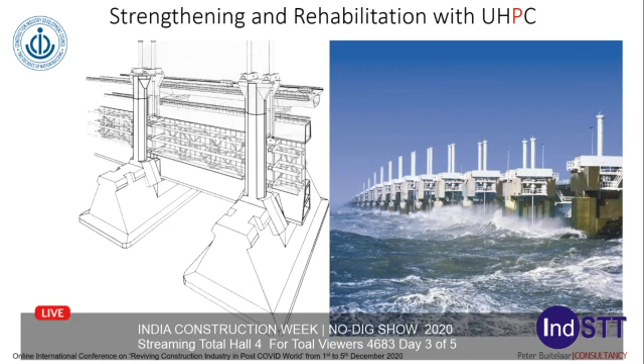The replacement of the 62 steel gates will be necessary because of the high additional cost of maintenance due to corrosion. Because of protection of the environment, waste from the repainting process is not allowed to come into the water of the Eastern Scheldt, and a construction needs to be built to avoid any spillage of material from the repainting process. An internal research project by the Civil Engineering Division is focused on the replacement with UHPC gates.

To stay within the weight limitations of the hydraulic system used to raise and lower the gates, a UHPC gate is a very interesting alternative. The gates will be produced as prefab parts and connected with in situ cast UHPC joints on site close to the location.